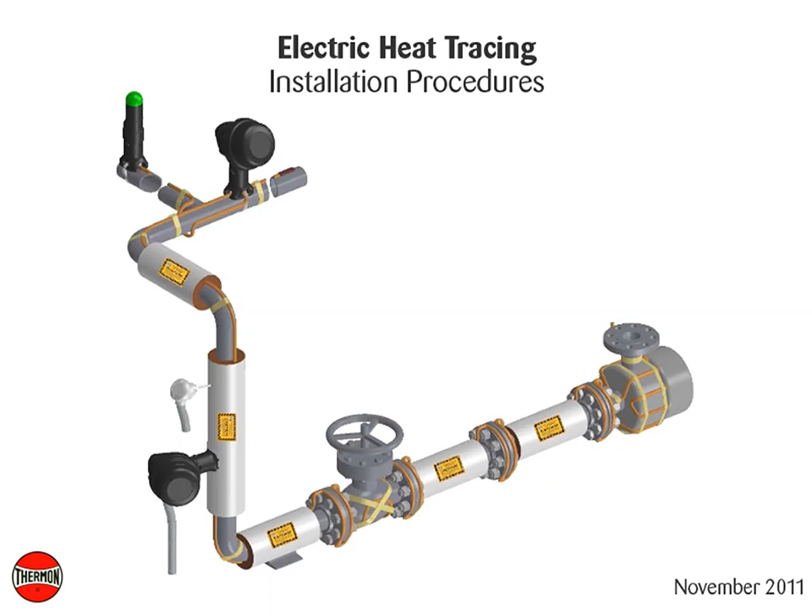The following installation procedures are suggested guidelines for the installation of a Thermon electric heat tracing system. Heat tracing cables may be installed in ordinary non-classified and hazardous classified locations depending on the specific cable options and approvals.

Termination kits to fabricate a heat tracing circuit are not addressed in these installation procedures. Refer to installation procedures included with cable termination kits, or contact Thermon for specific instructions to fabricate heating cable.

Individuals installing these products are responsible for complying with all applicable safety and health guidelines. Proper personal protective equipment, or PPE, should be utilized during installation. Contact Thermon if you have any additional questions.

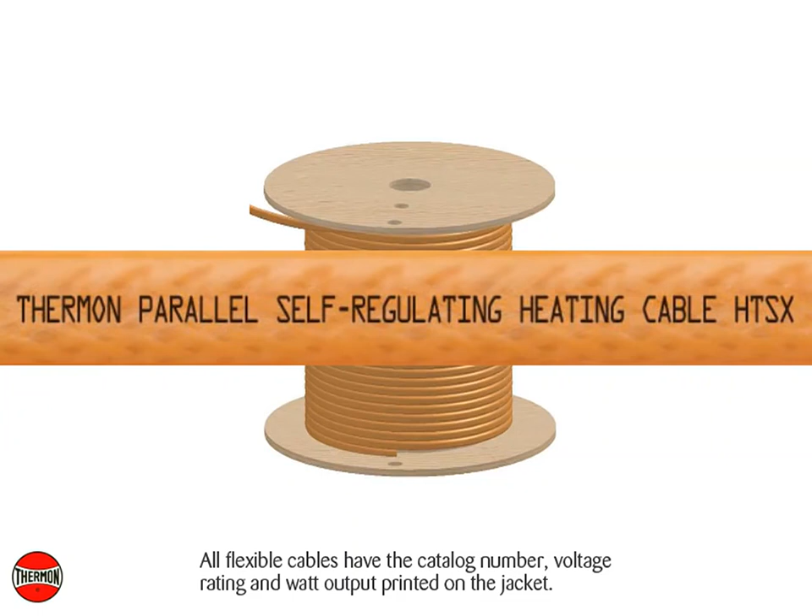Upon receiving heating cable, check to make sure the proper type and output have been received. All flexible cables have the catalog number, voltage rating, and watt output printed on the jacket. Visually inspect cable for any damage incurred during shipment.

The heating cable should be tested to ensure electrical integrity with at least a 500-volt DC megger. However, IEEE 515 and IEC 60079-30 recommend that the test voltage for polymer-insulated heating cables be 2500 volt DC.

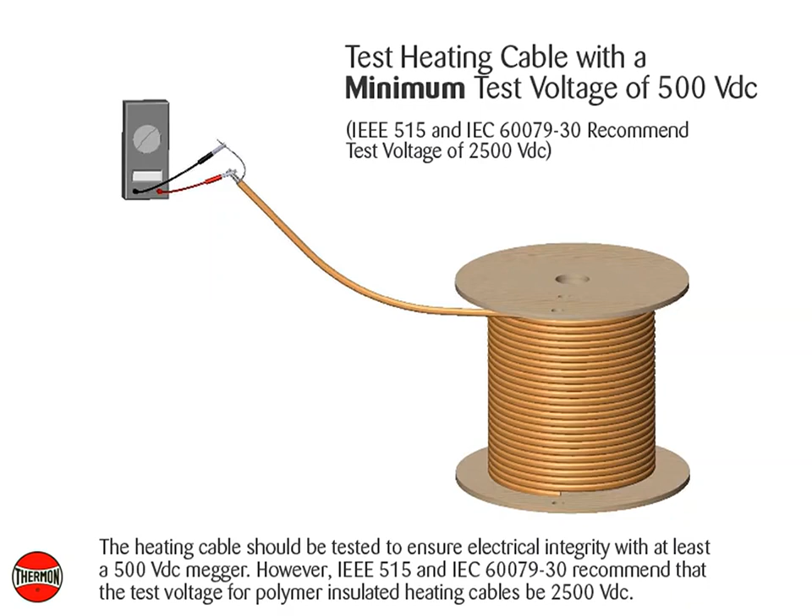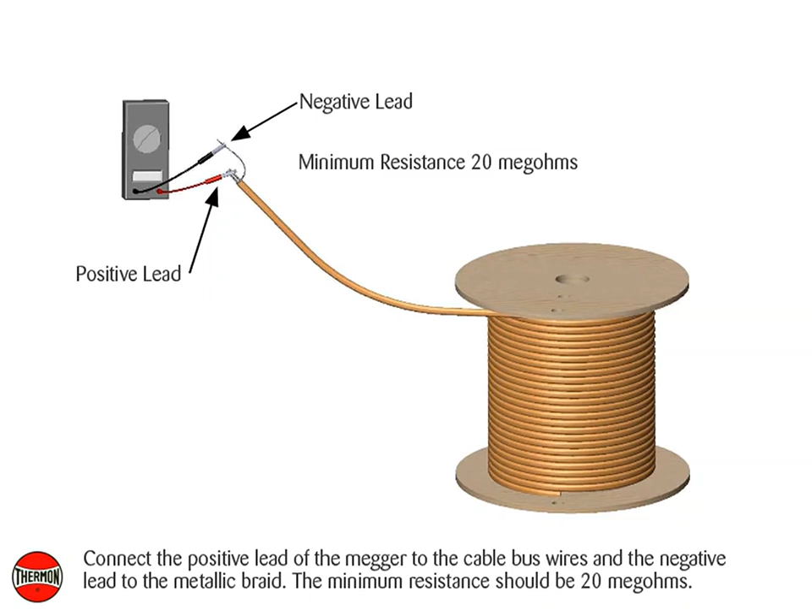Connect the positive lead of the megger to the cable bus wires and the negative lead to the metallic braid. The minimum resistance should be 20 megohms. Record test results on Record 1 of Cable Testing Report in Thermon Installation Procedures, Form PN 50207.

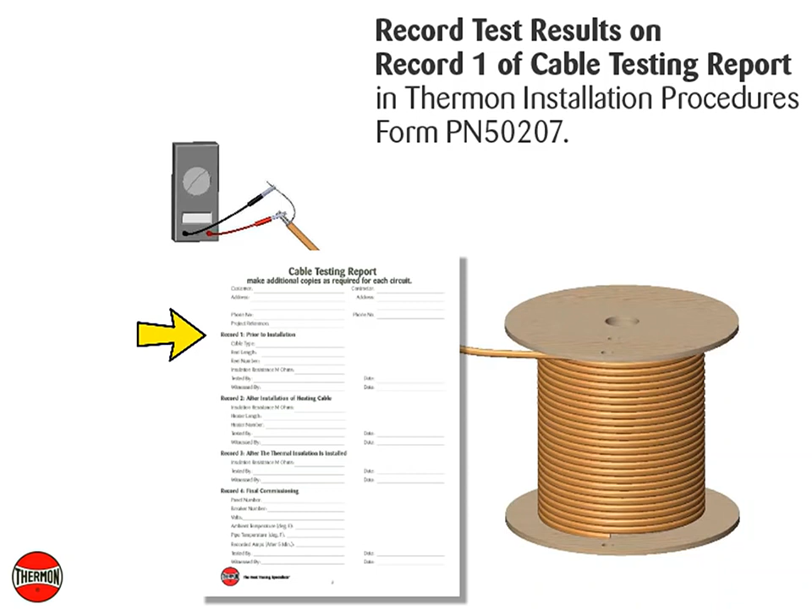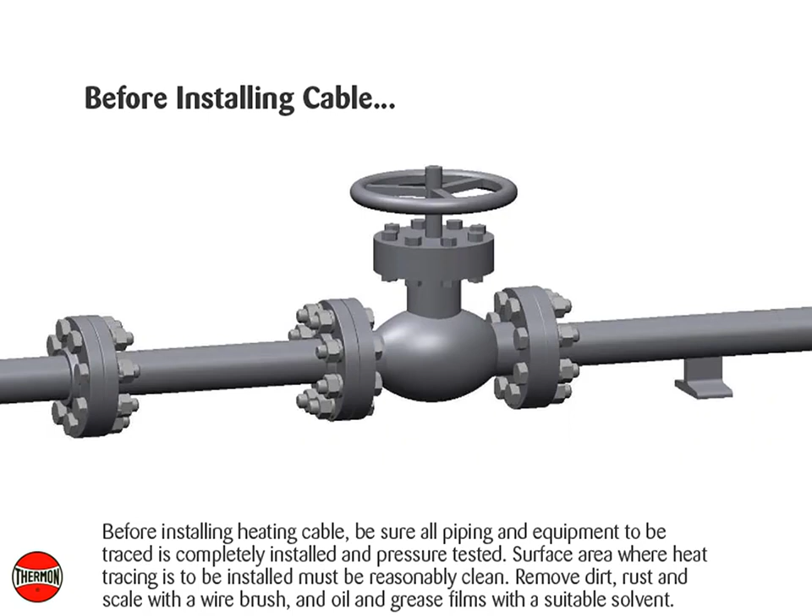Before installing heating cable, be sure all piping and equipment to be traced is completely installed and pressure tested. Surface area where heat tracing is to be installed must be reasonably clean. Remove dirt, rust and scale with a wire brush, and oil and grease films with a suitable solvent.

Locate the cable on the lower quadrant of the pipe at the 4 or 8 o'clock positions. If accessibility is a problem, the cable may be installed at the 10 or 2 o'clock positions. Temperature sensor should be located at least 90 degrees from all heating cables.

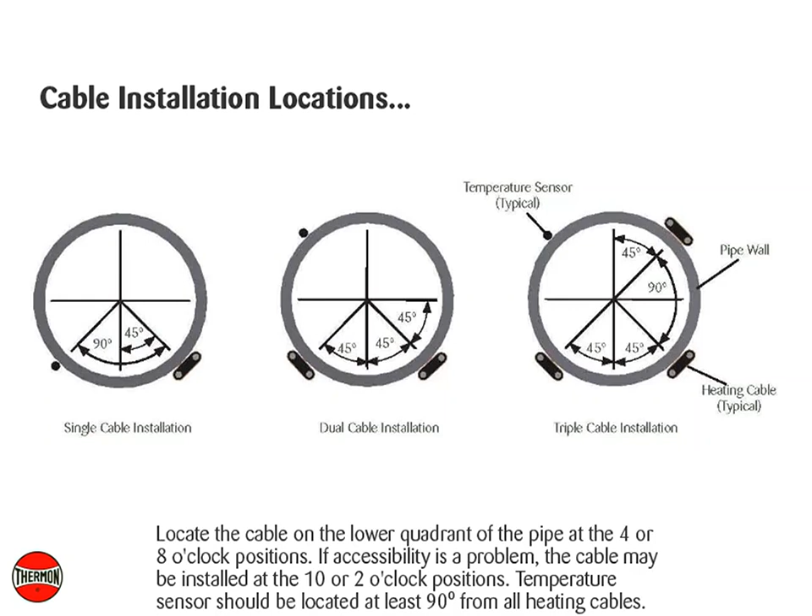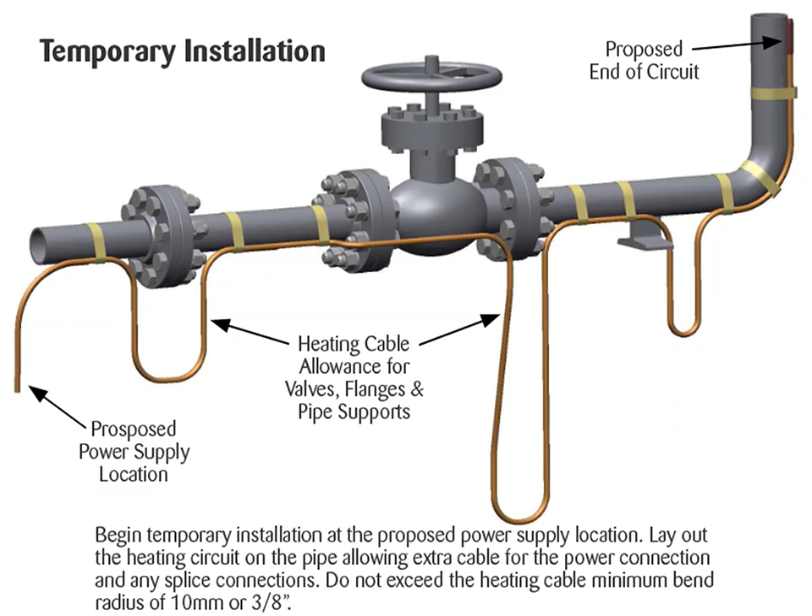Begin temporary installation at the proposed power supply location. Lay out the heating circuit on the pipe, allowing extra cable for the power connection and any splice connections. Do not exceed the heating cable minimum bend radius of 10 mm or 3/8 of an inch.

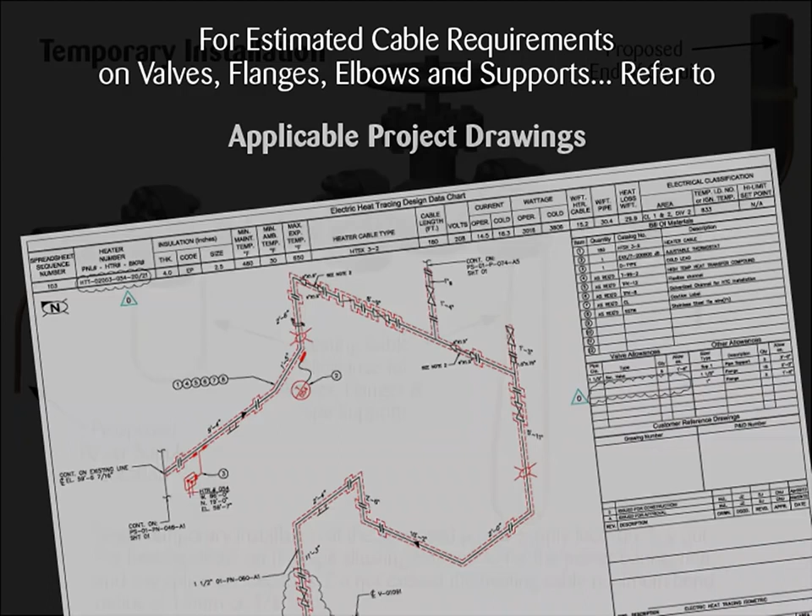Make heating cable allowances for valves, flanges, elbows and supports. Refer to applicable project drawings, Thermon CompuTrace design software, or for typical allowances for equipment with a flange rating of 150 pounds or less, Table 1 in Thermon Installation Procedures, Form PN 50207.

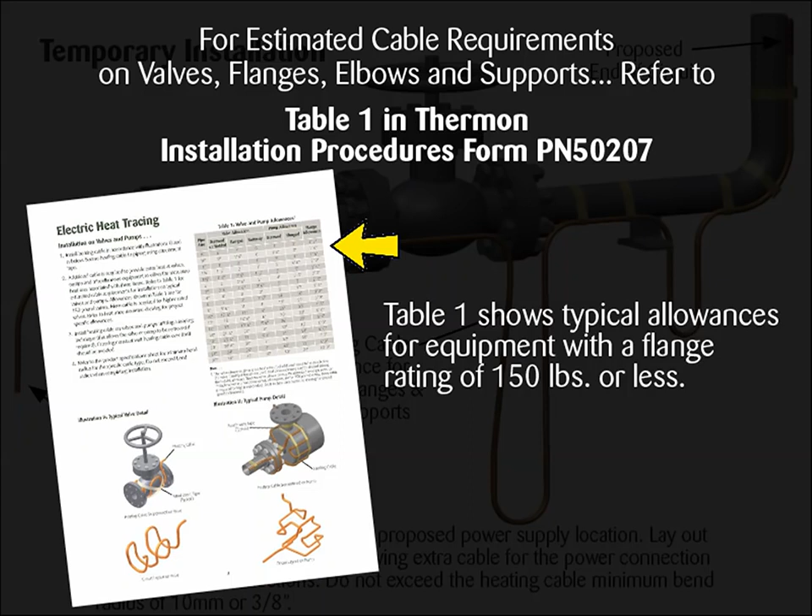Begin final heating cable attachment by securing the end of circuit termination kit and working back toward the power supply. Flexible heating cable is to be installed using circumferential bands of Thermon supplied attachment tape, installed at 30 cm or 12-inch intervals, to keep the cable in proper contact with the pipe.

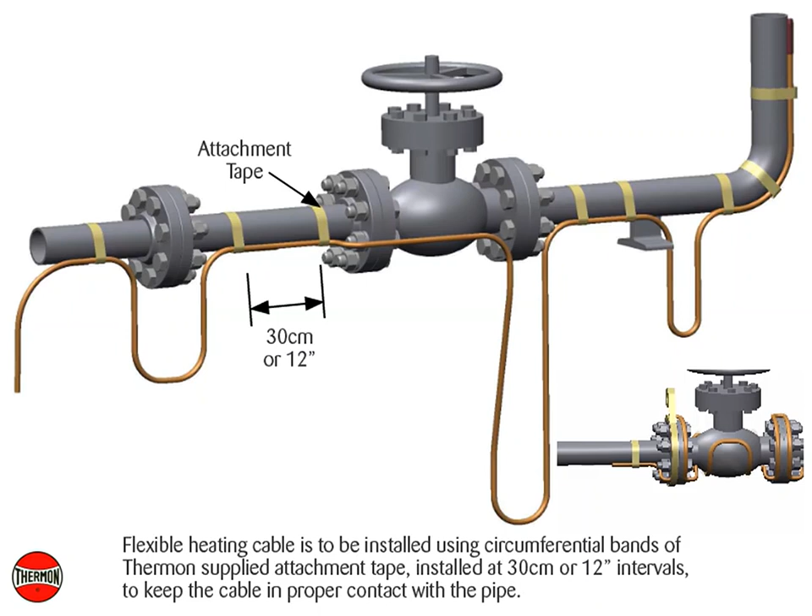In addition to the circumferential tape requirements, continuous covering of aluminum foil tape may be required when spray or foam thermal insulation is applied, or when heat tracing non-metallic piping.

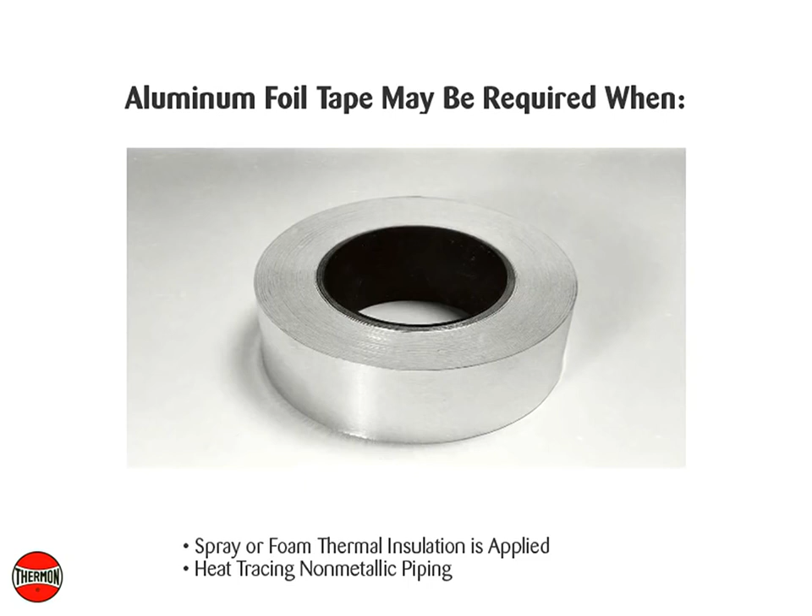Installation of heating cable on elbows, supports, and flanges. Elbows: Locate the cable on the outside radius of an elbow to provide sufficient heat to compensate for the added piping material. Secure the cable to the pipe on each side of the elbow with attachment tape.

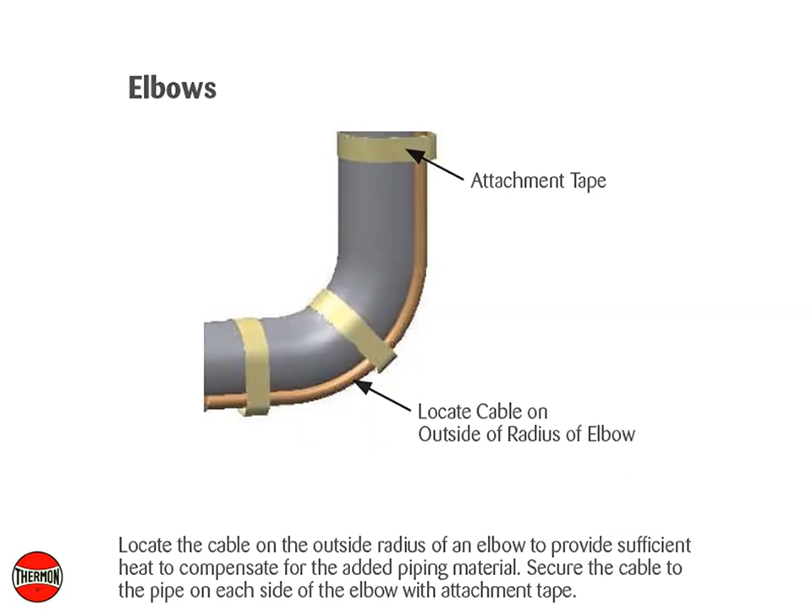Pipe supports: Insulated pipe supports require no additional heating cable. For uninsulated supports, allow 2 times the length of the pipe support plus an additional 40 cm or 15 inches of heating cable, or as specified on project drawings.

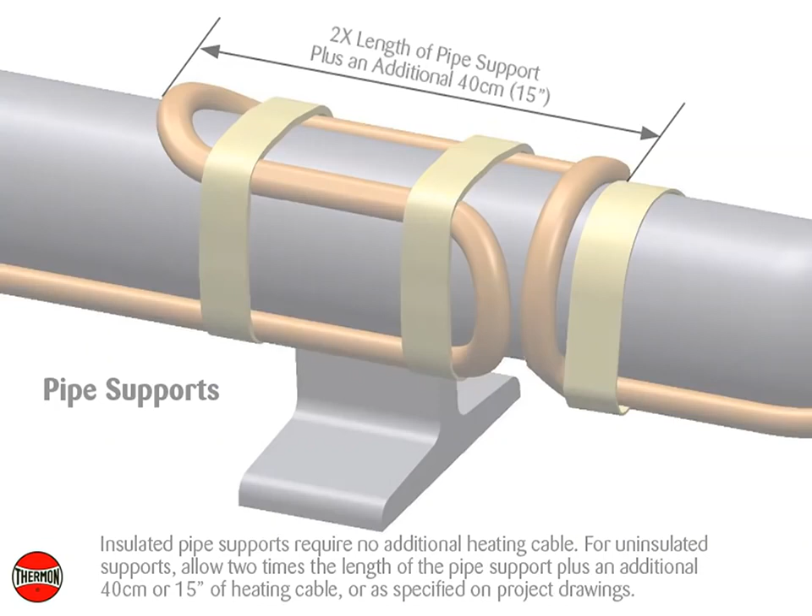Flanges: Allow cable to be looped around pipe on each side of, and adjacent to each flange. Heating cable must maintain contact with flange when bending around pipe flanges to compensate for additional heat loss.

Do not exceed heating cable minimum bend radius of 10 mm or 3/8 of an inch at temperatures down to -15 degrees Celsius or 5 degrees Fahrenheit, or 32 mm or 1 1/4 inch at temperatures down to -60 degrees Celsius or -76 degrees Fahrenheit.

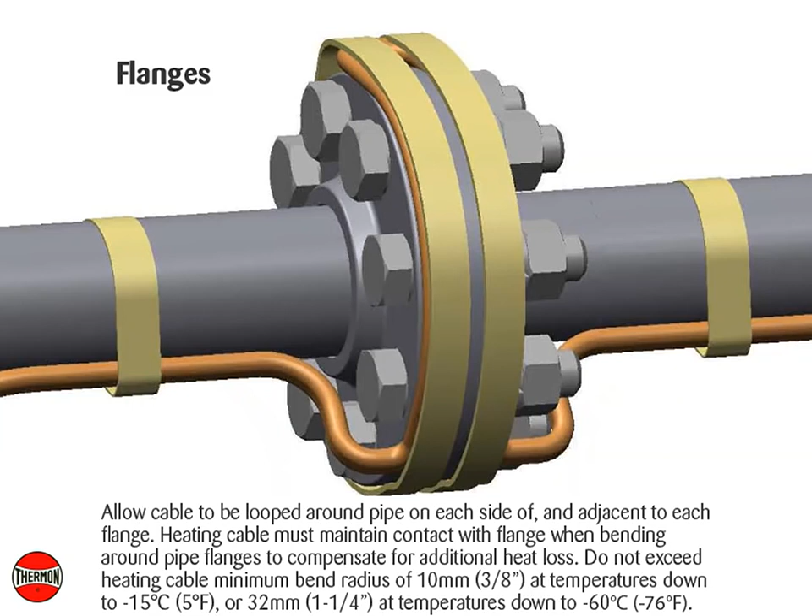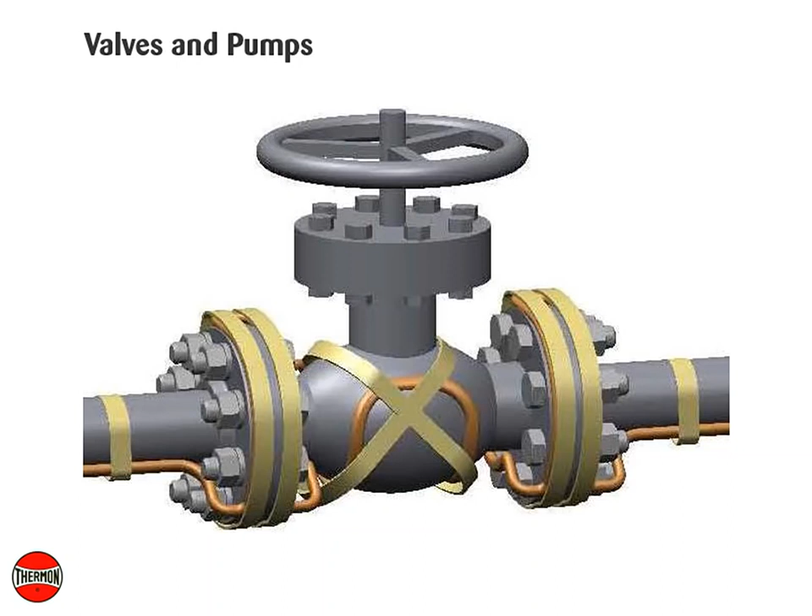Installation on valves and pumps. Install heating cable on valves and pumps utilizing a looping technique. This allows the valve or pump to be removed if required. Crossing constant watt heating cable over itself should be avoided. Do not exceed heating cable minimum bend radius of 10 mm or 3/8 of an inch.

The valve allowance is the total amount of additional cable to be installed on the valve. If multiple tracers are used, the total allowance may be divided among the individual tracers. The total valve allowance may be alternated among tracers for multiple valves in the heat trace circuit.

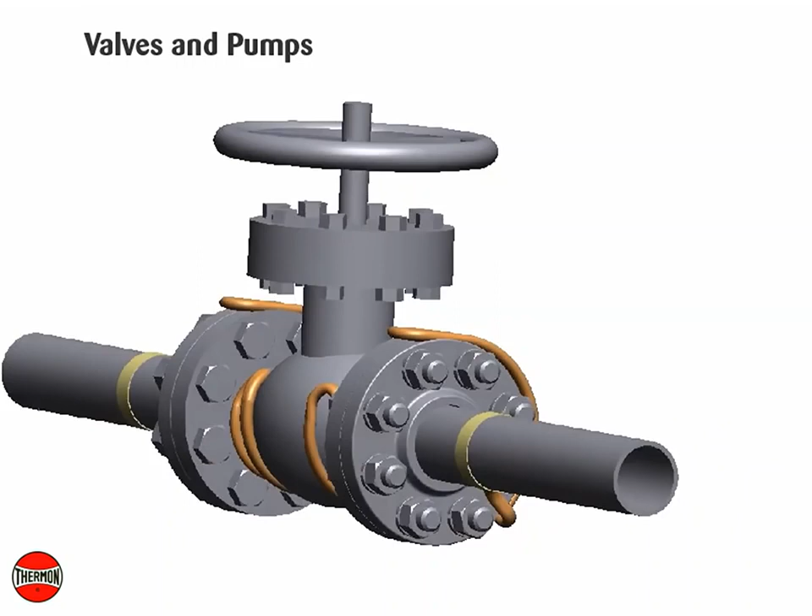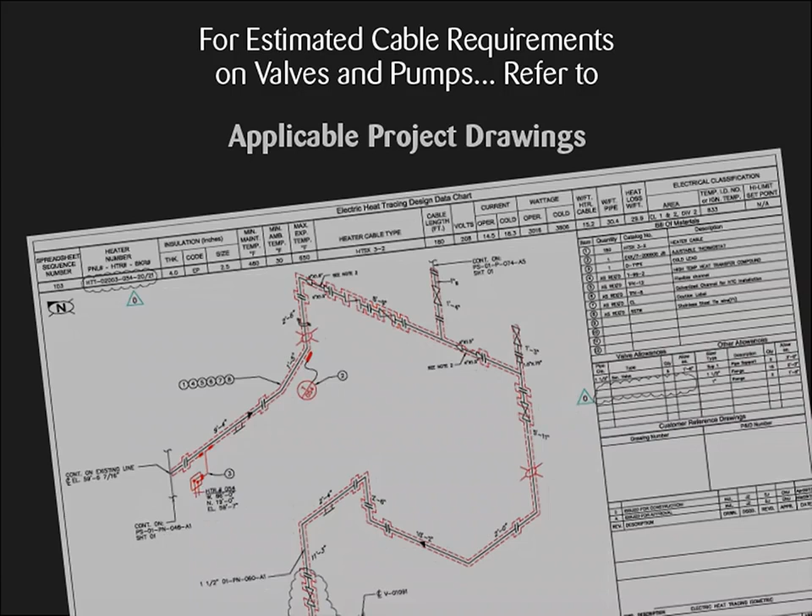For estimated cable requirements on typical valves and pumps, refer to applicable project drawings, Thermon CompuTrace design software, or for typical allowances for equipment with a flange rating of 150 pounds or less, Table 1 in Thermon Installation Procedures, Form PN 50207.

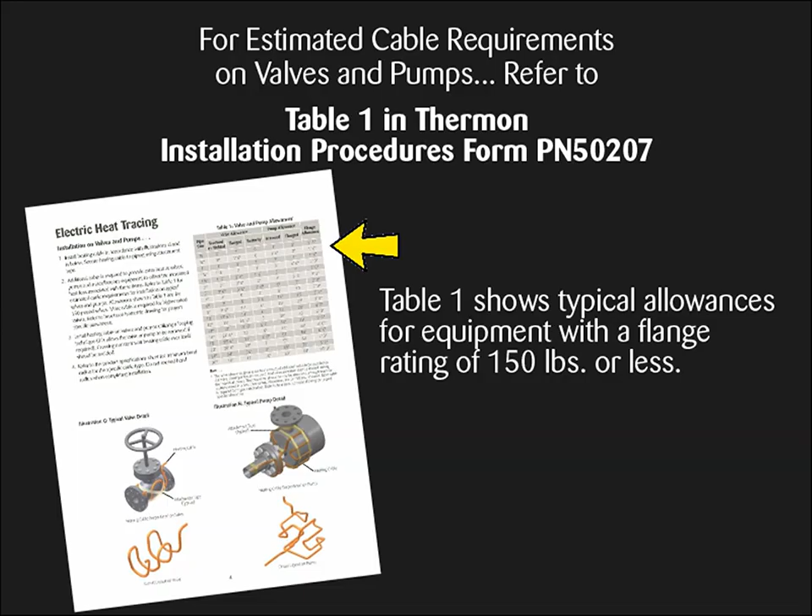Complete splice connections, if required, in accordance with the installation procedures provided with this splice kit.

Before making power connections, the heating cable should be tested to ensure electrical integrity with at least a 500-volt DC megger. However, IEEE 515 and IEC 60079-30 recommend that the test voltage for polymer-insulated heating cables be 2500 volt DC.

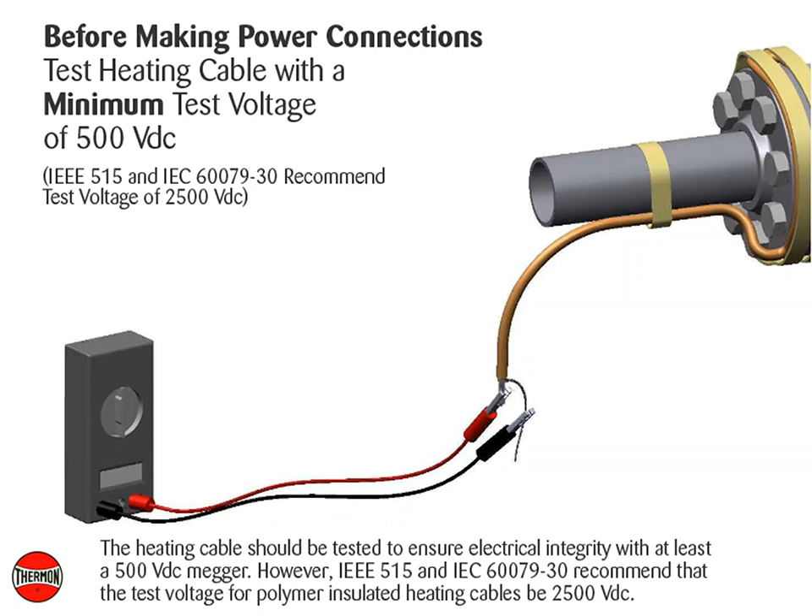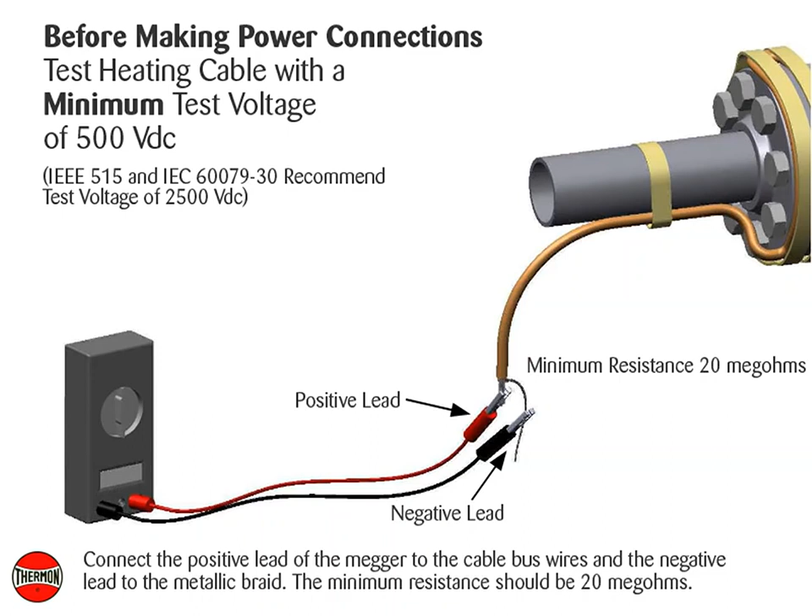Connect the positive lead of the megger to the cable bus wires and the negative lead to the metallic braid. The minimum resistance should be 20 megohms. Record test results on Record 2 of Cable Testing Report in Thermon Installation Procedures, Form PN 50207.

Install power kit connection in accordance with the detailed installation procedures provided with the power connection kit.

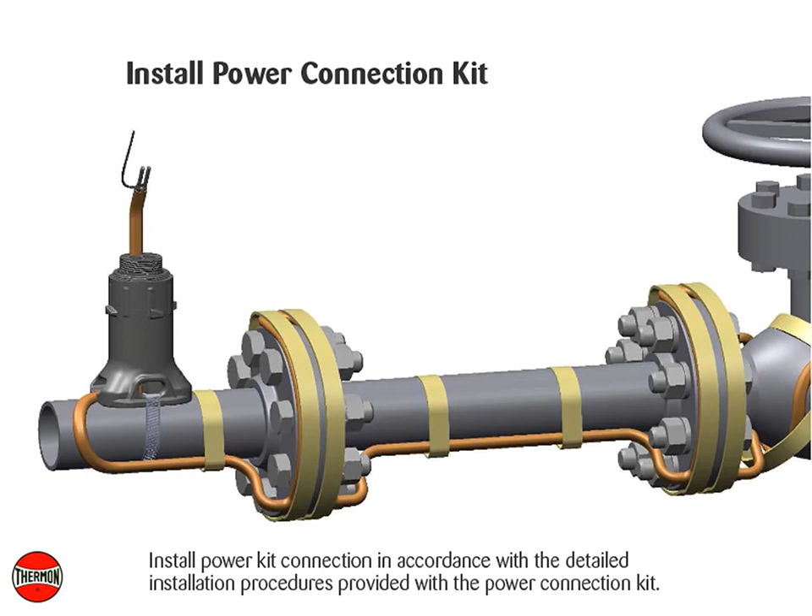Termination kits to fabricate a heat tracing circuit are not addressed in these installation procedures. Refer to installation procedures included with cable termination kits, or contact Thermon for specific instructions to fabricate heating cable.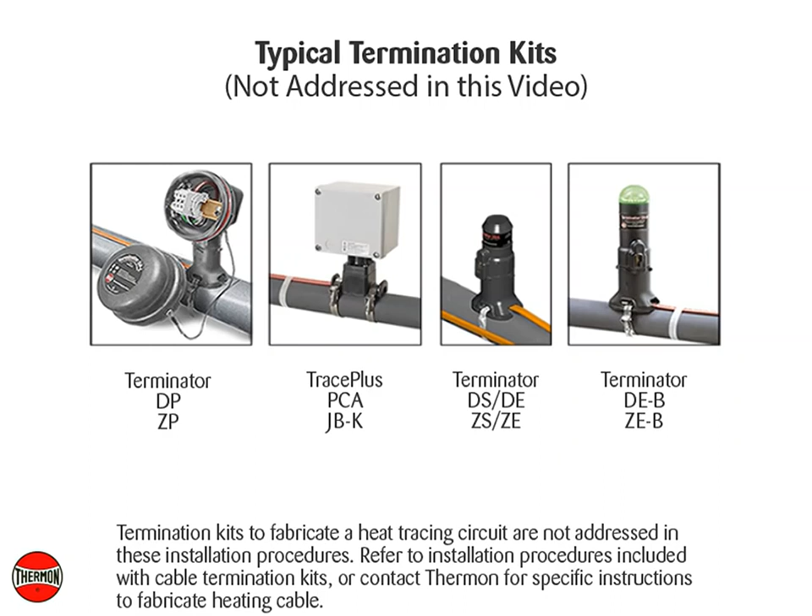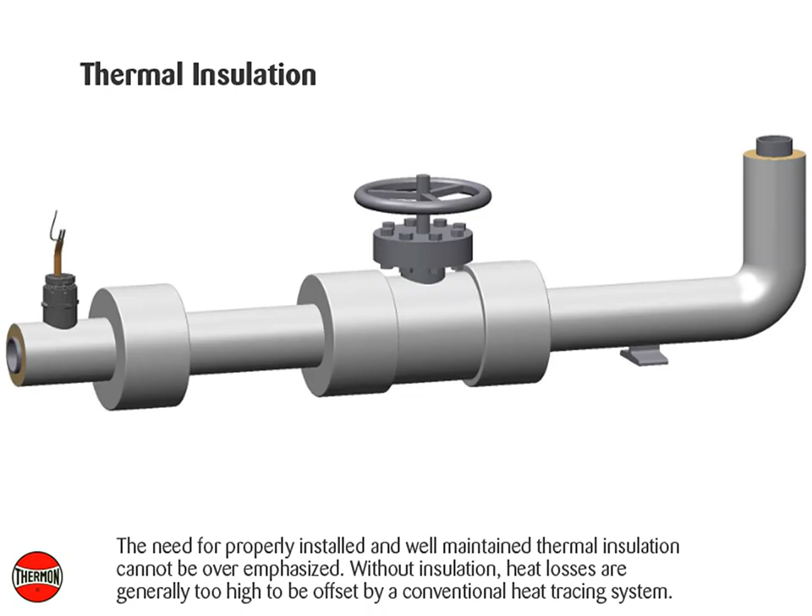Thermal insulation. The need for properly installed and well-maintained thermal insulation cannot be overemphasized. Without insulation, heat losses are generally too high to be offset by a conventional heat tracing system. In addition to piping and inline equipment such as pumps and valves, all heat sinks must be insulated. This includes pipe supports, hangers, flanges, and in most cases, valve bonnets.

Verify heat loss consideration when using insulation blankets. Regardless of the type or thickness of insulation used, a protective barrier should be installed. This protects the insulation from moisture intrusion, physical damage, and helps ensure the proper performance of the heat tracing system. Seal around all penetrations through the thermal insulation.

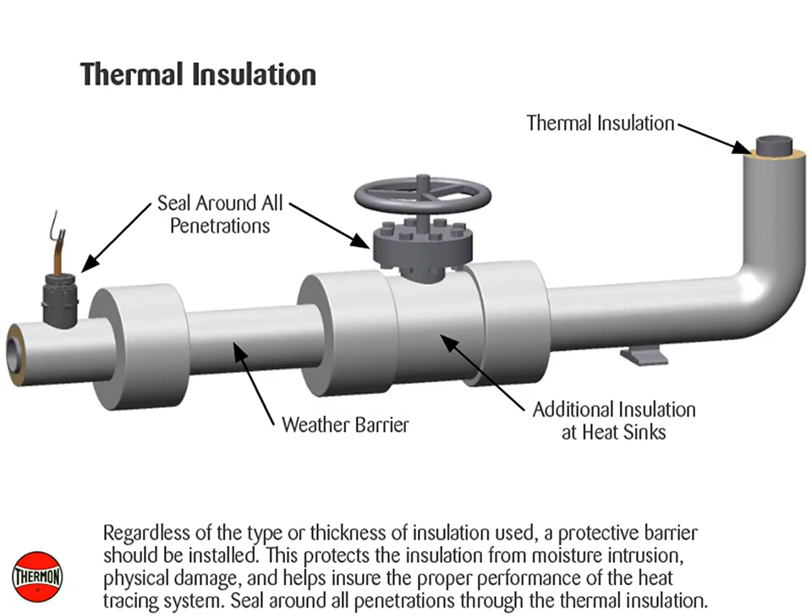After installing thermal insulation and weather barrier, but before energizing the heating circuit, the megger test should be repeated. This should call attention to any damage to the heating cable that may have occurred while installing the insulation. Record test results on Record 3 of Cable Testing Report in Thermon Installation Procedures, Form PN 50207.

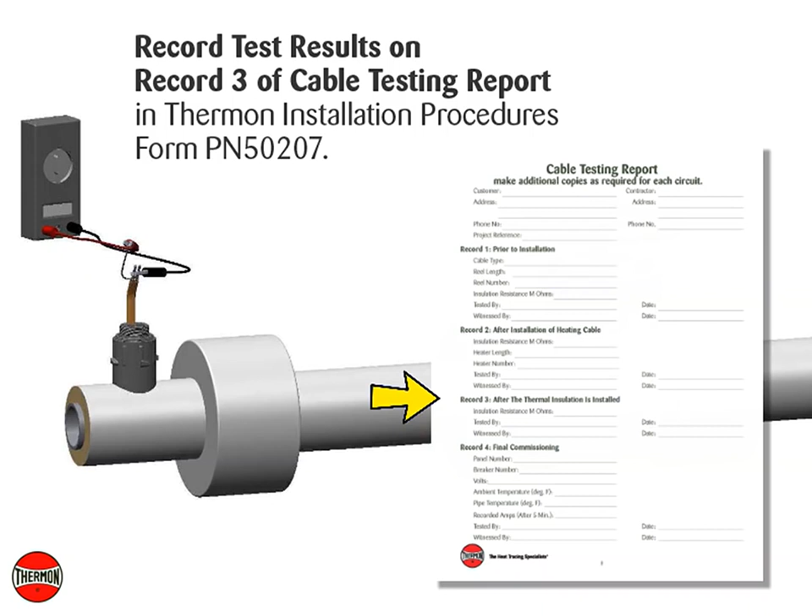Apply caution labels to insulation weather barrier at 305 cm or 10-foot intervals.

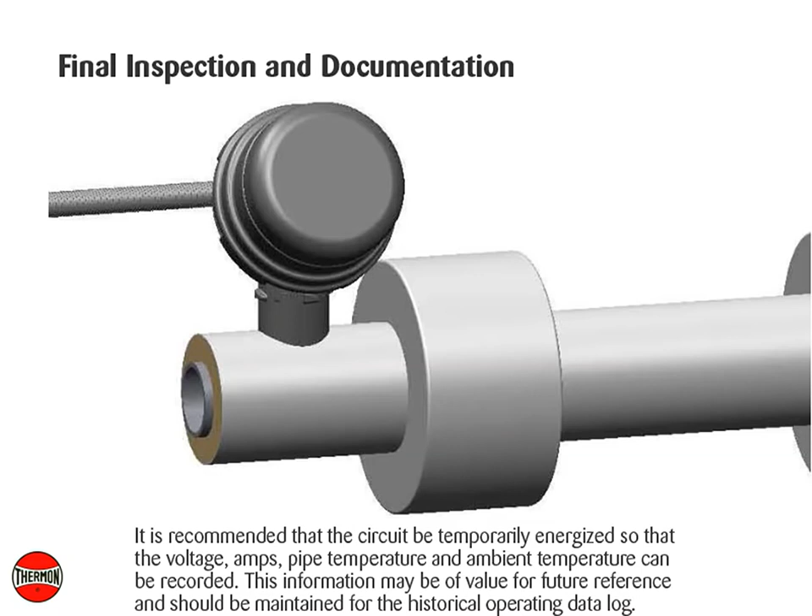Final inspection and documentation. It is recommended that the circuit be temporarily energized so that the voltage, amps, pipe temperature, and ambient temperature can be recorded. This information may be of value for future reference and should be maintained for the historical operating data log. Record test results on Record 4 of Cable Testing Report in Thermon Installation Procedures, Form PN 50207.

Note: to ensure the heating cable warranty is maintained through installation, the testing outlined on the Thermon cable testing report must be completed on the installed heating cables. Contact Thermon for additional details.